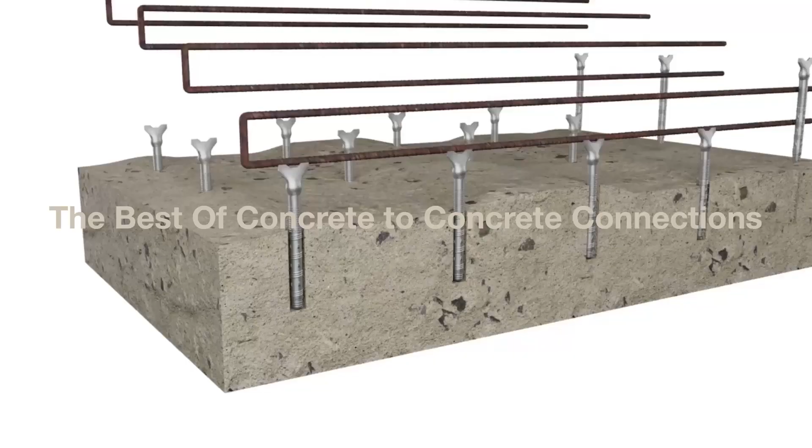My name is Ashish Mittal and I welcome you to Hilti India's first ever digital launch event where we will unveil the latest innovation for post-installed rebar connections.

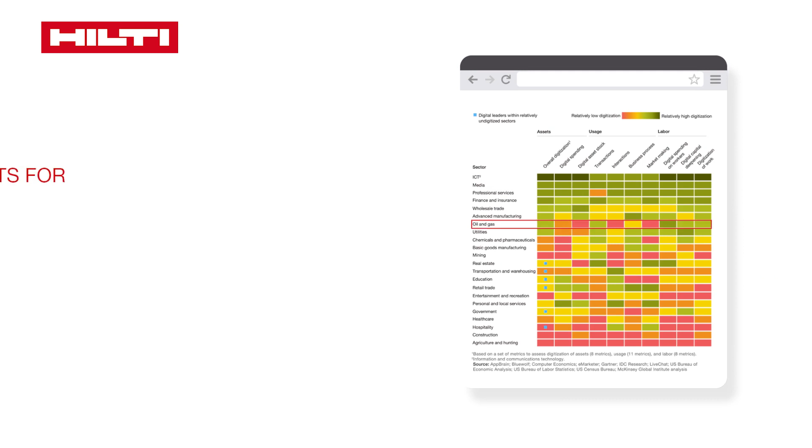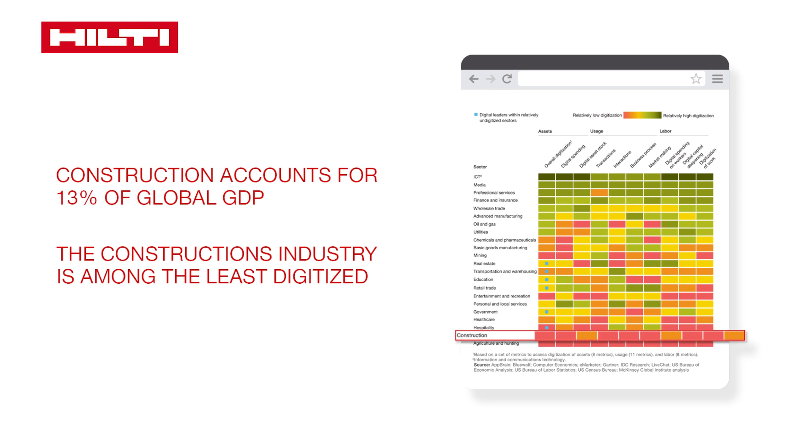The world is transforming and it is the construction industry which might be left behind in this era of digitalization. Construction contributes to 13% of global GDP, but in terms of digital adoption, it is at the bottom of the table, right just above the agriculture industry. There are a lot of challenges that our industry is facing today. Labor shortages, increasing cost, material unavailability, increasing carbon footprints, and so on and so forth.

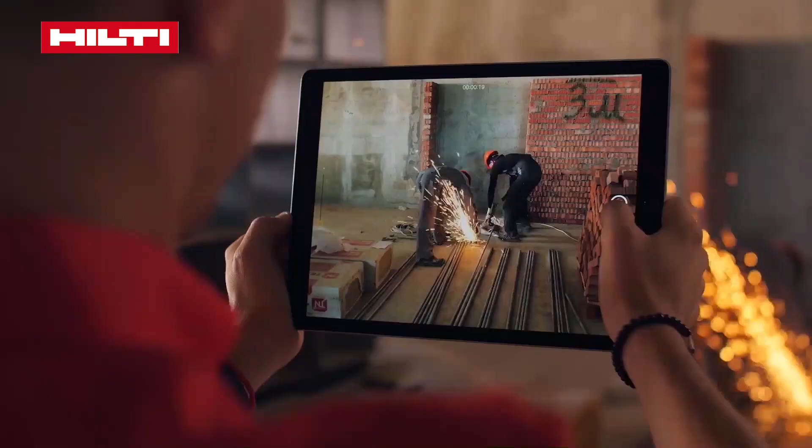While we are still dealing with a lot of inefficiencies due to conventional systems, billions of dollars are wasted every year due to poor resource management, lack of information, and unplanned activities or mistakes during the course of construction. There is an urgent need for the adoption of digital processes in construction because with digital tools such as software, we can better manage resources, seamlessly share information across different stakeholders, and simulate multiple design scenarios to find out the most optimized solution. Hilti is at the forefront in driving this digital disruption in the construction industry.

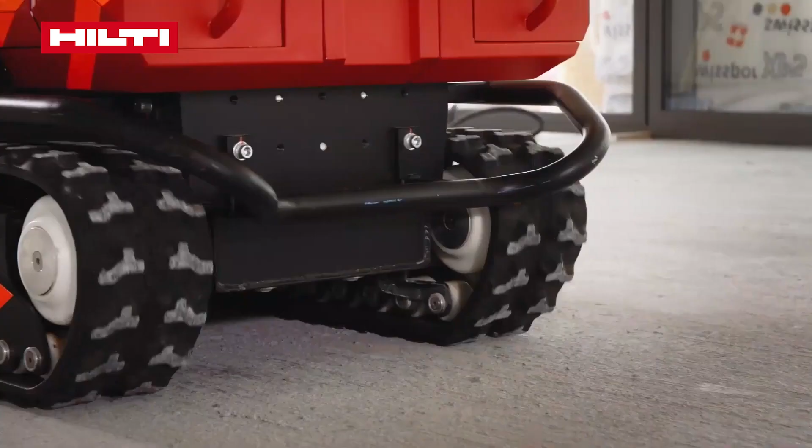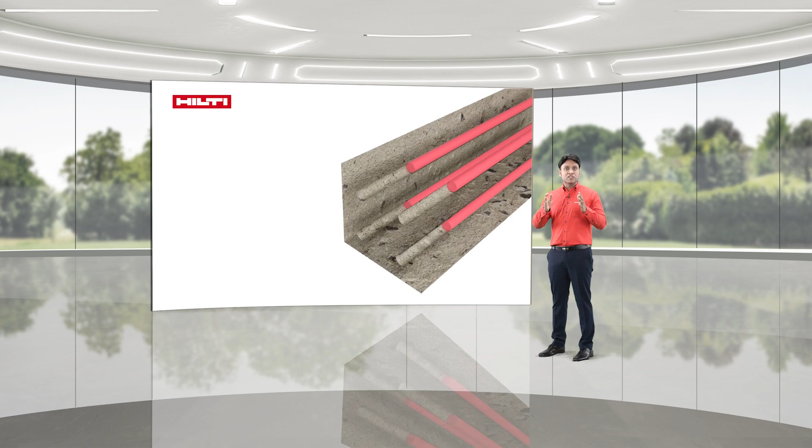Our purpose is to make construction better, to make it more resilient, to make it more sustainable, to make it more efficient, and to make it more productive. And we do that by bringing revolutionary innovations in hardware, in software, in services to our customers. And today, we are going to launch new innovations in software and services for one of the most critical applications for any construction project, post-installed rebar, or simply called rebarring. It is a common application across different project types.

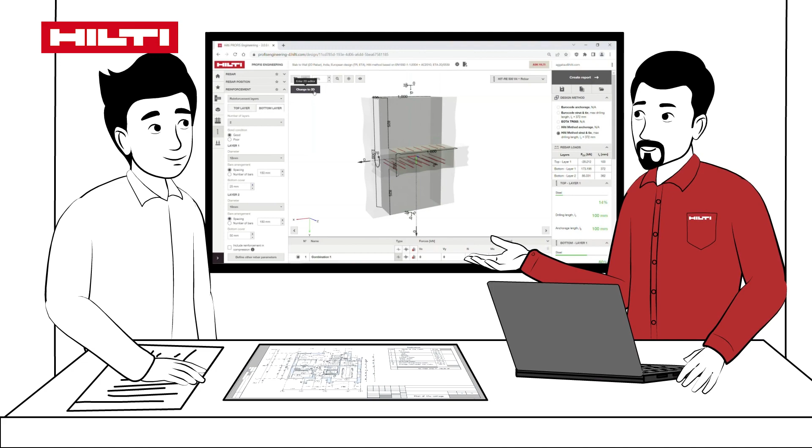Rebarring is simply the addition of a new rebar into existing concrete so that the new rebar behaves like a cast-in rebar. This is not a new application, but despite years of experience and practice, we still find a lot of thumb rules being used which sometimes compromise the safety of the connections. We believe that every post-installed connection has to be designed using the most qualified and tested products, and installed using the most productive tools and technologies to ensure that the connection is behaving monolithically and the safety of the structure and its occupants is not compromised. Hence today, we are introducing the next generation of technologies which will overcome all these challenges.

At Hilti, we are productivity, safety, and sustainability partners to our customers. And innovation is in our DNA. More than a decade ago, we introduced the anchoring and the rebarring software for the first time in India. And since then, we have continued our passion to be your technical partners, aiming at improving the quality of designs with our future-ready software. We launched one more innovation in the form of PROFIS Engineering in the year 2020. This was the first of its kind software which is cloud-based, helps in estimating the realistic behavior, conforming to national and international codes, and helps designers by providing detailed specifications.

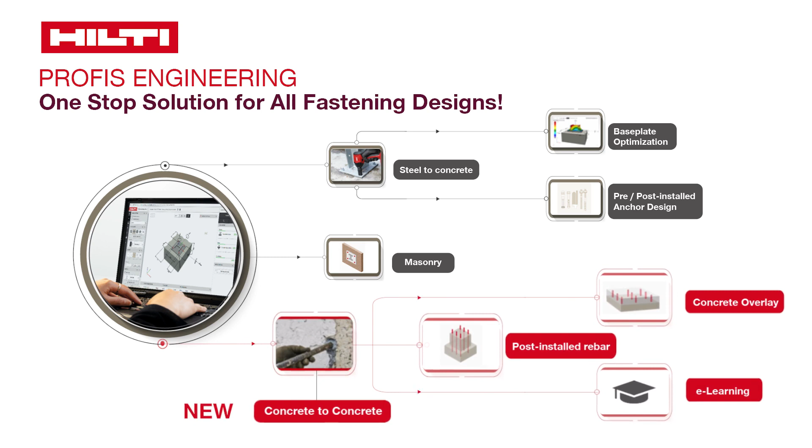But we strive for more, as there has been a greater demand to use this futuristic technology for all post-installed fastening applications. So here, I present to you one more revolution in our software offerings, the concrete-to-concrete design module inbuilt in our PROFIS Engineering software. Are you ready?

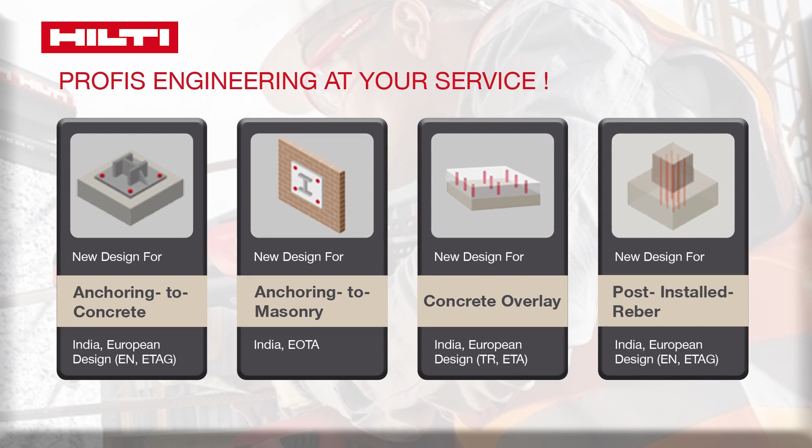Gone are those days when you were using different softwares for different applications. Now you have everything in one software. Post-installed anchor, post-installed rebar, masonry designs, and all of that with many additional benefits such as ease of access, design productivity, selecting the most optimized solution, and finally, proper documentation. And to give you more details, I would like to invite my colleague Kaushal Aggarwal.

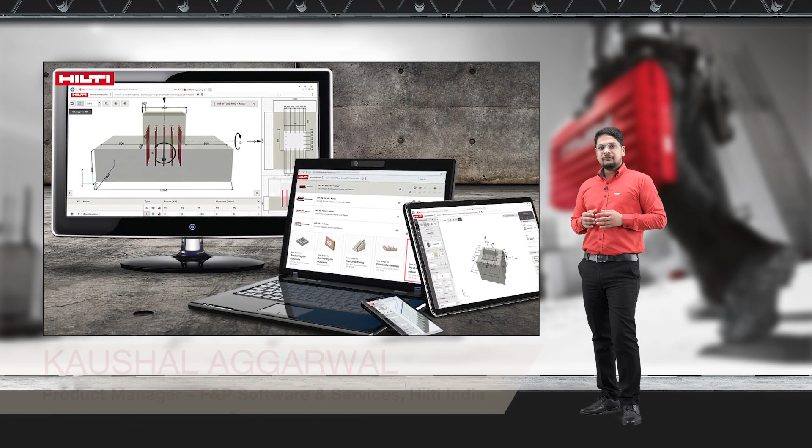Thanks, Ashish. In this new age of software revolution, desktop-based software seems very limited for well-known reasons. You need to get multiple approvals to get your product installed. You have to depend on your IT team to manually install the product. The updates are often delayed because you have to go through the similar process one more time. It also causes delay in troubleshooting the issues.

In the year 2020, PROFIS Engineering took care of all of these issues in anchor designs. Now what is best is that all the concrete to concrete connections are being added as modules within the same software. So you don't even have to get a separate approval to use these features. Your all-weather Hilti friend in the cloud covers all your fastening requirements now.

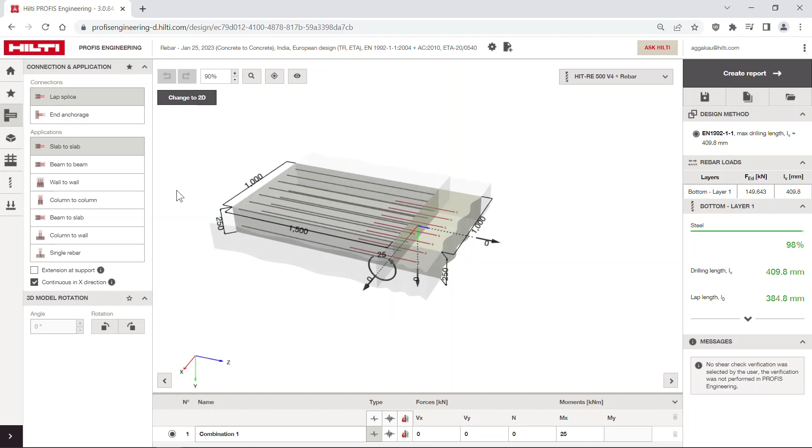When we started to bring features on the cloud, we thought of reinventing the entire user experience, refurbishing the user interface, arranging the design input fields in separate tabs according to your workflows, and the most important of them all is the templates. We wanted you to easily select the type of application without jumbling around multiple options. Now they are trimmed and arranged in two simple tabs: lap splices for extension jobs and end anchorage for rigid connections.

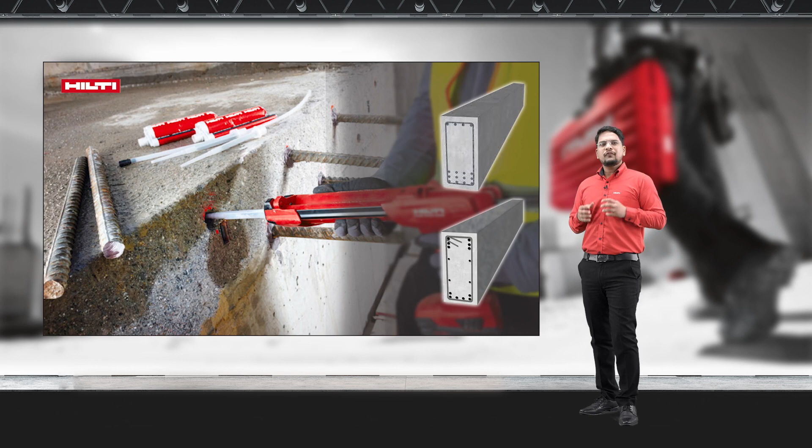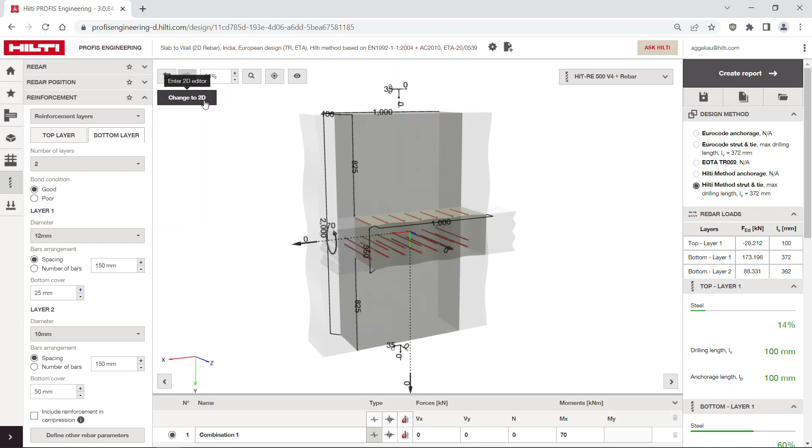Now I'm very excited to talk about the next feature because I personally like it the most, because it addresses one of the biggest challenges and long-awaited demand of structural designers. That is to simulate the actual rebar arrangements in design software. I would say we heard you, because 2D rebar modeling in PROFIS Engineering gives you the flexibility such as multiple diameters in the same layer.

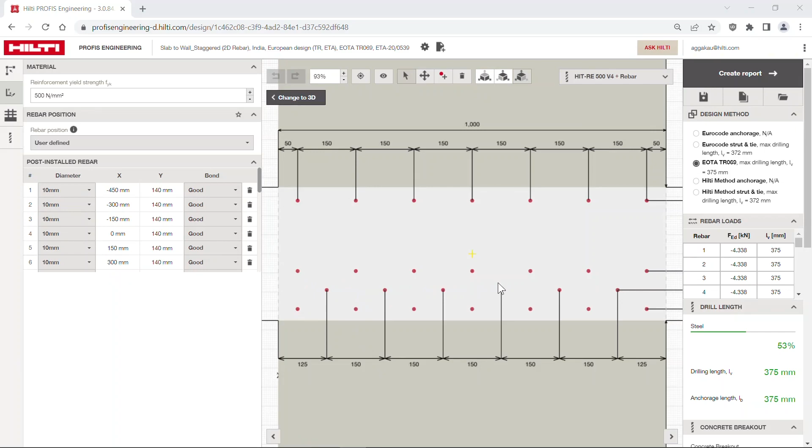You can alter the spacing between the rebars, and multiple layers of rebars can be done now, as well as the staggered rebar arrangement is possible with the accuracy of up to 1 millimeter. So with this new feature, we have overcome all the earlier software design limitations, and now it is a piece of cake to simulate the actual site conditions.

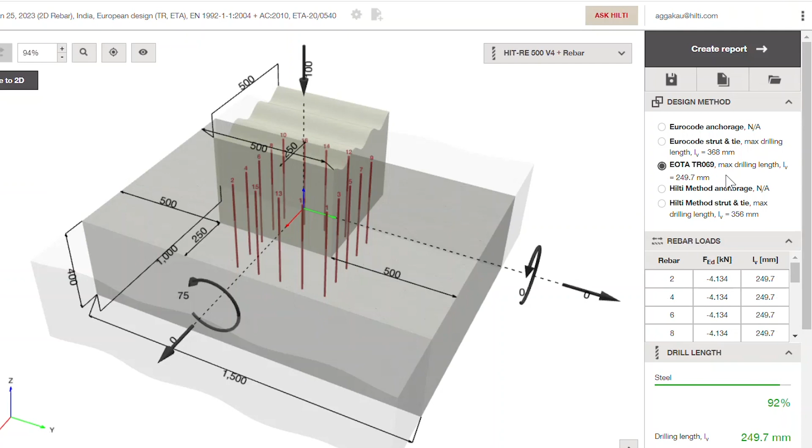Another interesting ability of the software you can see under the Design Method tab on the right side of the screen. The software performs multiple simultaneous designs in one go, and with the help of this tab, you can review all the solutions offered by different design methodologies and select the most optimized design solution.

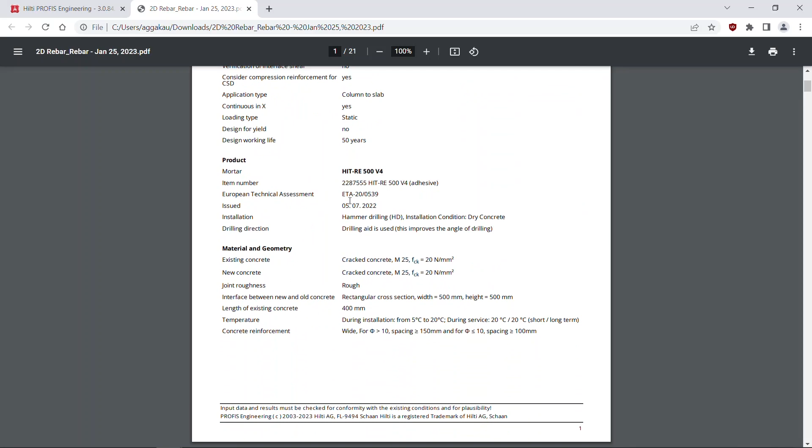Once you have selected the optimized design solution, you can create a design report, and you will observe that we have left no stone unturned in improving it to aid you in documentation. Some of the notable enhancements are: you can find all the product details on the first page of the report itself. We have also included the different views of the design model.

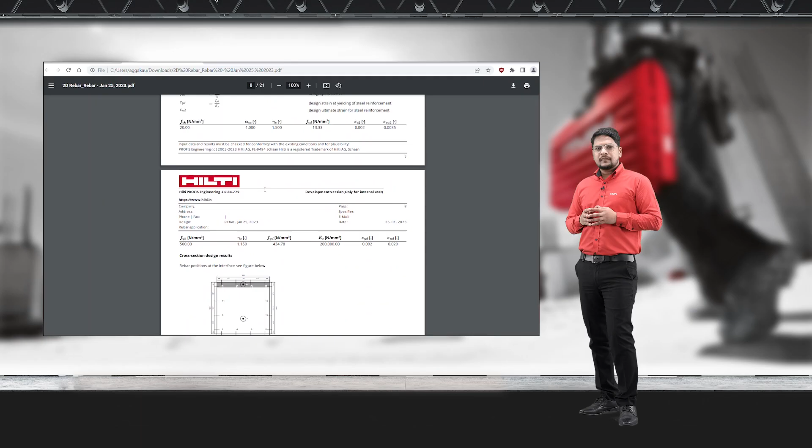You can find summary and detailed code references along with the calculations. And at the end of the report, we have included installation data for ease of execution at the job site. And the best part of all this, we have arranged it in such a manner that you can easily replicate it by hand calculations. Kaushal, I was wondering how designers are going to access these amazing features.

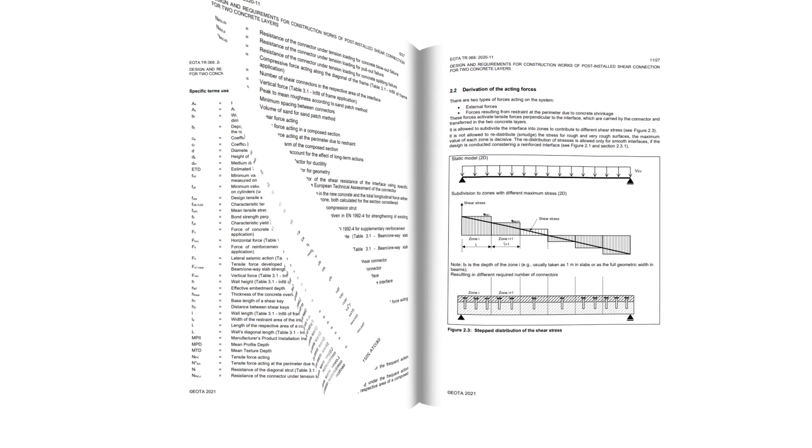Let's understand this further. TR066, introduced by EOTA, the European Organisation for Technical Assessment, is the guideline which I have been talking about, and this document has the complete procedural details of designing shear connectors.

I am sure you must be curious to know how this new design method TR066 ensures connection safety, which means that a new overlay layer must not be delaminated from the existing old concrete structure, and here the interface shear resistance plays a crucial role. So this design method primarily works on three key mechanisms: adhesion, friction and dowel action. First of all, let's understand what adhesion means here.

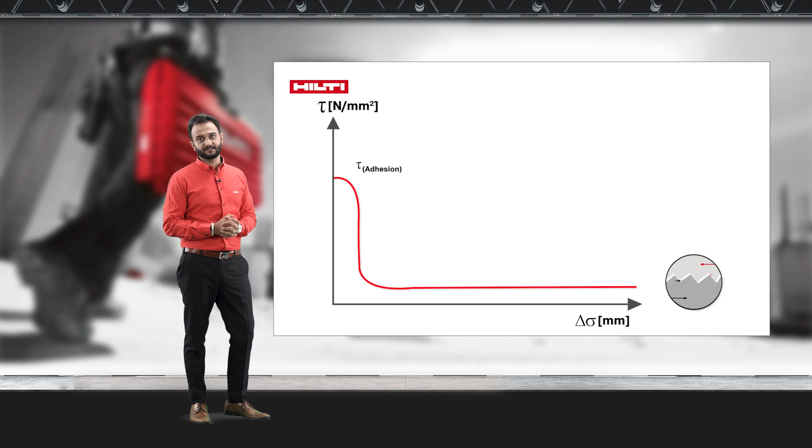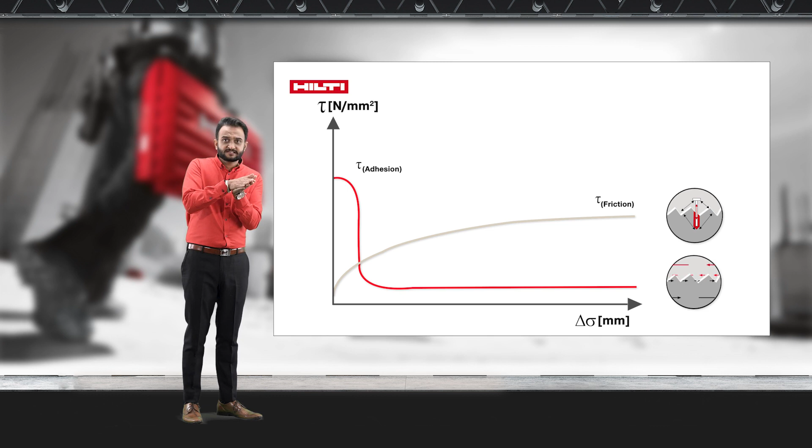So here, adhesion refers to the original adhesive property of the concrete, which gives resistance to the overlay concrete layer from slippage. Second, friction. The friction arises from the surface roughness between two concrete layers, adding further resistance to prevent the slippage of the overlay layer. Third, when adhesion and surface roughness in combination are not sufficient to offer resistance, it becomes necessary to add steel elements to resist the slippage of overlays and thus make the connection safe.

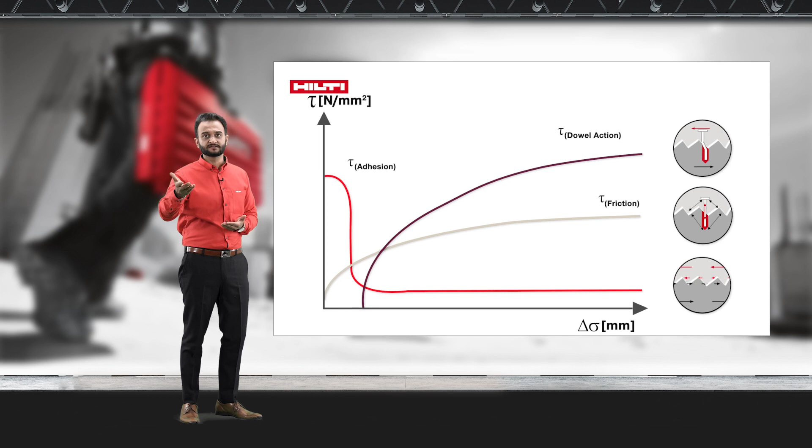All the factors just defined, that is adhesion, friction, and dowel action, are interdependent, which means increasing the capacity of one can influence the result of others. Let's understand this by picking a parameter, which is surface roughness. TR066 classifies the surface roughness in four categories: very smooth, smooth, rough and very rough. Now with this example, you can see the influence of the surface roughness category on the number of shear connectors, while we assume the same shear force at the interface.

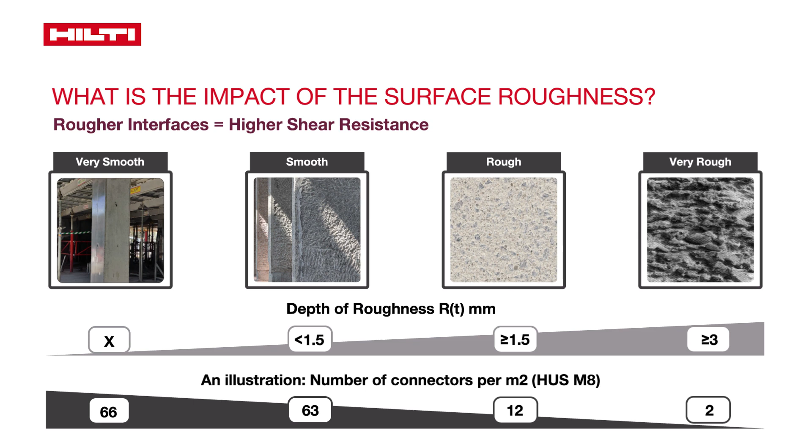Being familiar with the working principle and influencing factors, I am sure that you must be looking forward to knowing which products are approved with the new design method. With EOTA TR066, a selected range of Hilti chemical and mechanical anchors are approved to be designed. They are none other than RE500 V4 and HY200-R V3 with threaded rod, and also the mechanical anchor HUS4 can be used. But we know that you have been designing shear connectors using rebar, and TR066 does not limit you. You can still design rebar as shear connectors and get detailed documentation with RE500 V4 or HY200-R V3 chemicals based on the Hilti research method, derived following similar principles as TR066.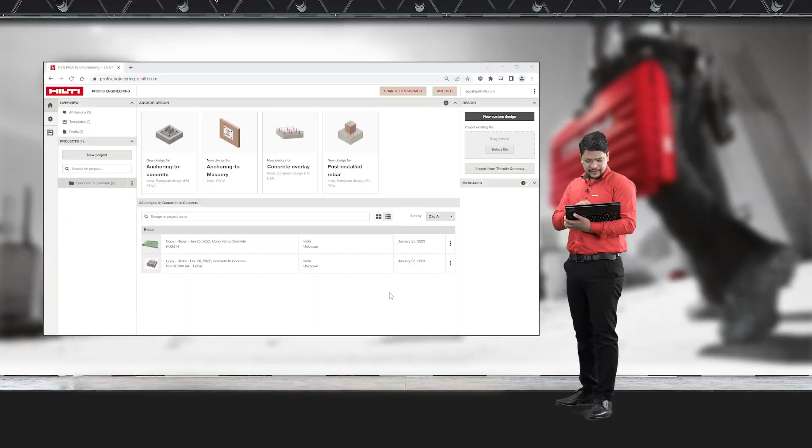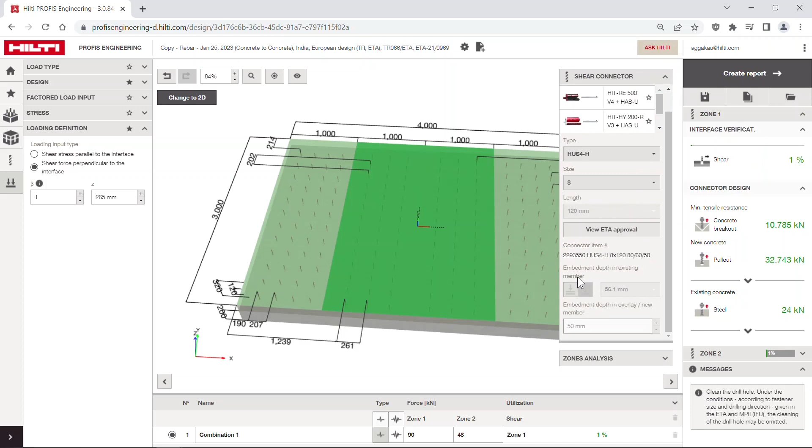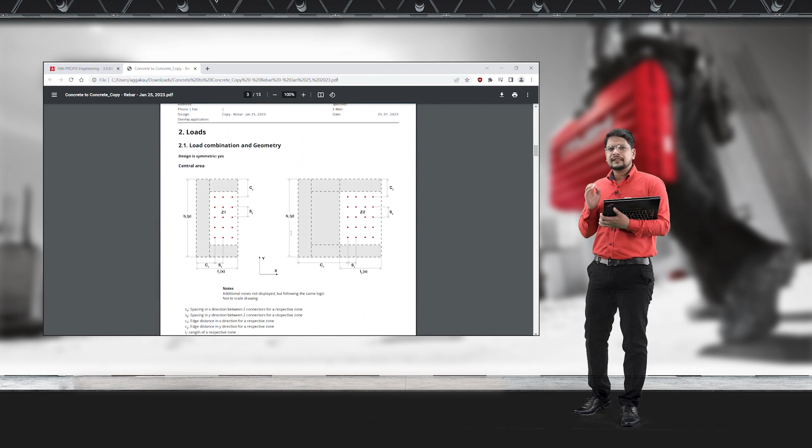So Kaushal, can you explain the concrete overlay tab in PROFIS Engineering to help our attendees understand how to implement the design method with the help of PROFIS Engineering software? Sure, Prashant. PROFIS Engineering is already ready to serve. The concrete overlays module can be used to design shear connectors for 4 different types of applications. The software allows the designer to input surface roughness criteria and the number of zones to optimize the number of shear connectors according to the real life force input. As the output, you will get the embedment depth inside the existing concrete member as well as in the new overlay layer. And as you might know, the best part of PROFIS Engineering as a whole is its quality of design report, which will help you in your documentation requirements.

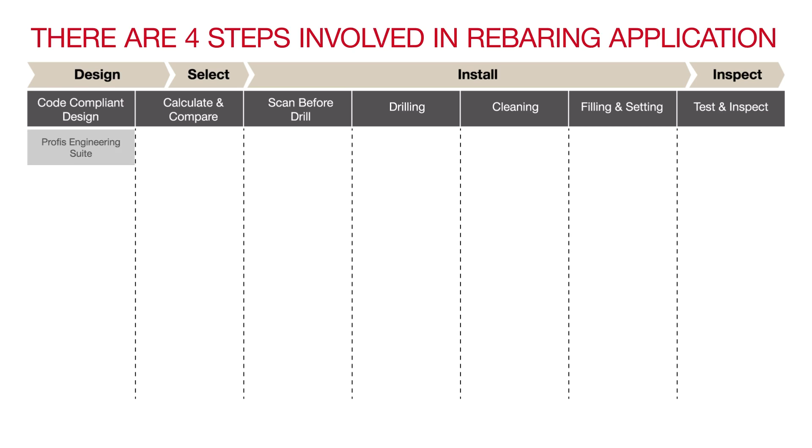We cannot complete this launch event without showing you the safe post-installed rebar installation procedure. Typically, the procedure starts with design, selecting the right installation method or tools, scanning, drilling, cleaning, and finally injecting the mortar and setting the rebar. As we have shown, you can now perform the code-compliant design with PROFIS Engineering, with installation data in the report. You can now calculate the chemical volume with the Hilti volume calculator and select the right installation technique and required accessories.

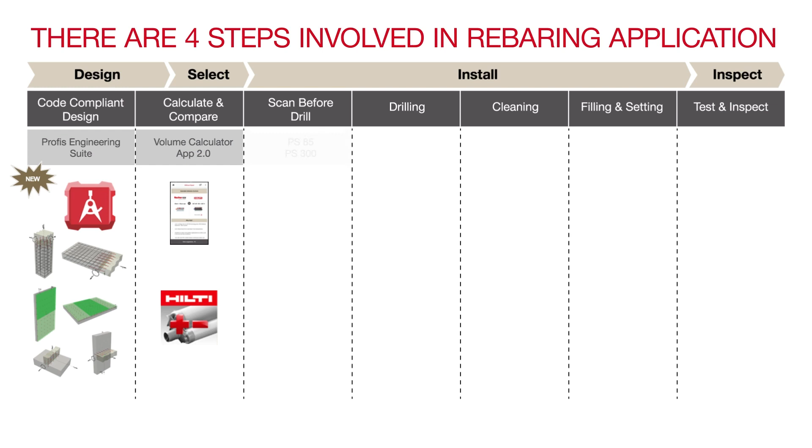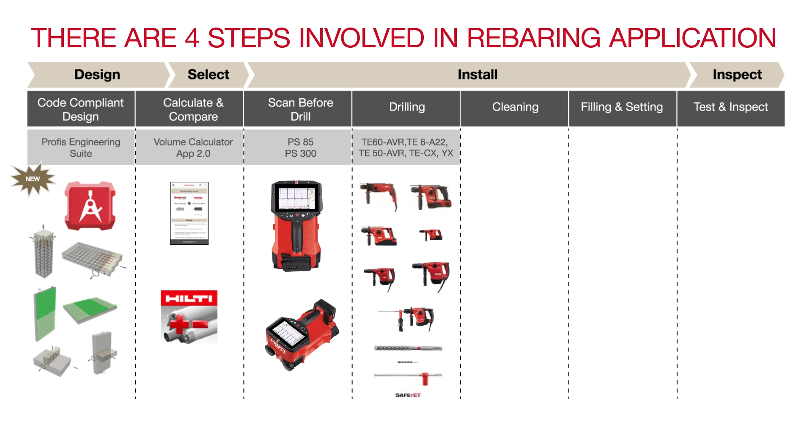Next step is scanning the surface, which will ultimately avoid damaging the existing reinforcement and drilling unnecessary holes. Hilti scanning tools such as PS300 can provide the rebar layout visuals on the spot. Next is drilling, which can be very well done by Hilti combi hammers and extra rugged Hilti hammer drill bits. Inadequate cleaning of holes during installation can reduce the performance of chemical mortars significantly. Hilti SafeSet technology eliminates this factor almost entirely by automatically cleaning the hole while drilling.